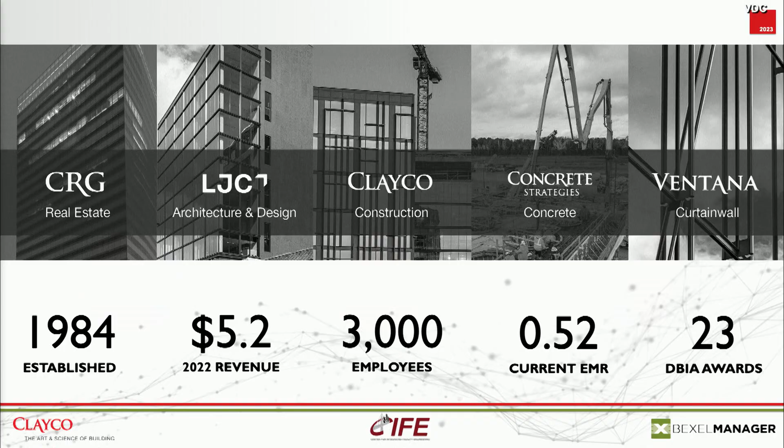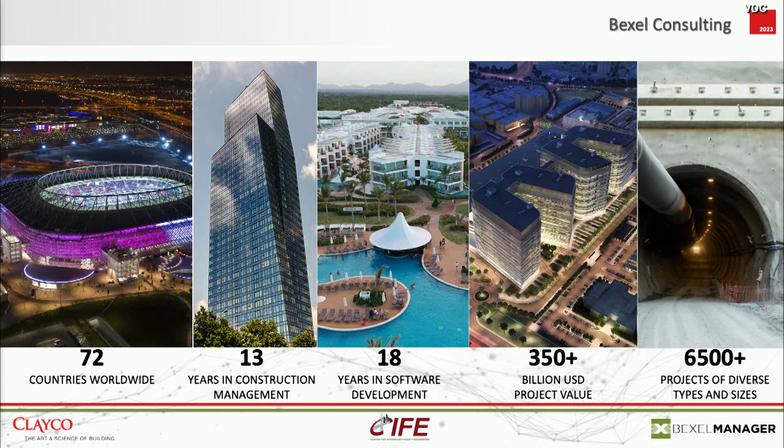Now, Bexel? Bexel Consulting is a software development and consulting company, and we are specialized in BIM in construction. For almost 2 decades, we've been working on different types of projects all around the world. We were, in a way, pioneers of implementing BIM in different types of projects, also using and enriching different types of innovation in terms of software development related to BIM. Throughout the years, we worked on collaboration and development of different BIM standards alongside Building Smart International. As you may see on these slides, we worked on different types and sizes of projects.

And also in the past 6 months, we doubled the number of our clients using our services and also using our unique BIM management platform for BIM construction. Our clients vary in different types and sizes, and include different portfolios of clients that we work with, including architects, designers, different types of designers, contractors, main contractors, subcontractors, and project owners.

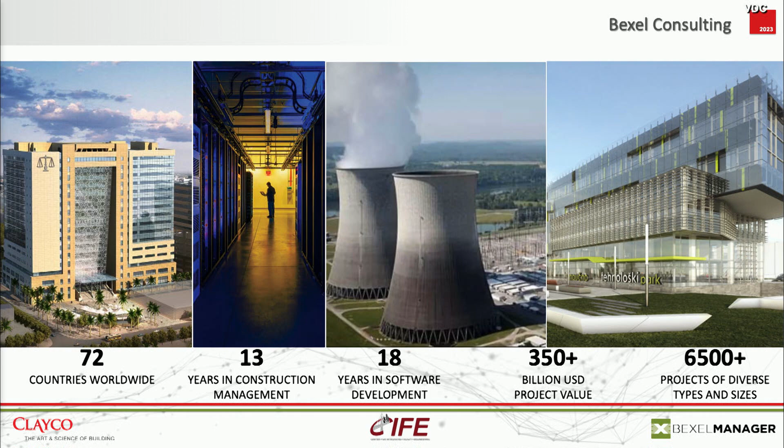So today we are going to talk about how we integrated together, came together to form a team, and looked through the technology partnership. So we'll start with Clayco's vision, and we'll go through technology strategy alignment, and how it's important to align it with our business model. Integrated delivery, or integrated data, is where we'll focus, and how the role of data is really important. As Rob mentioned, data needs to be clean, and that's what we'll look into, and how strategic partnership is a main part of technology strategy alignment.

Then we'll also go deep into Bexel Manager and what their roadmap is with technology. We'll go after strategy for collaboration. The important things for strategy to collaborate are team structure, workflow, adoption, and consultancy. And then we'll go through the challenges and successes which we found while implementing Bexel in our team.

So in our growing markets, we at Clayco really needed to stay competitive in the market. We really approached Bexel as a consultant partner that we could work together with, that brings various experiences from countries all around the world, clients with different backgrounds and different experiences. We really wanted to harness those experiences to our abilities and advance with current clients and future clients.

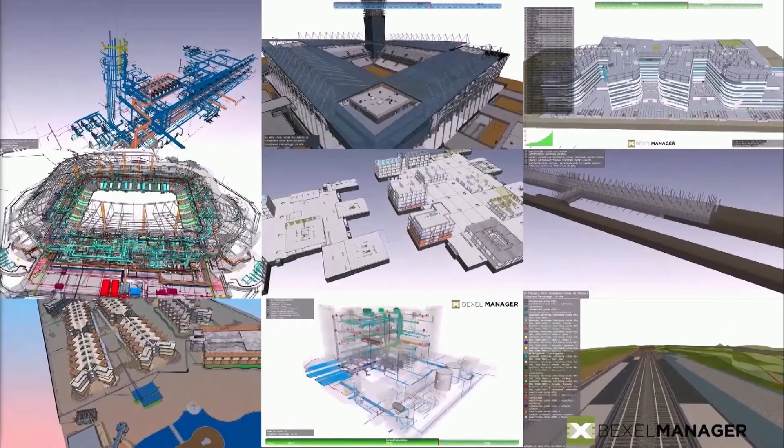This video shows you some of the workflows and functionalities of the Bexel Manager platform and how these different features are integrated using our online cloud-based application.

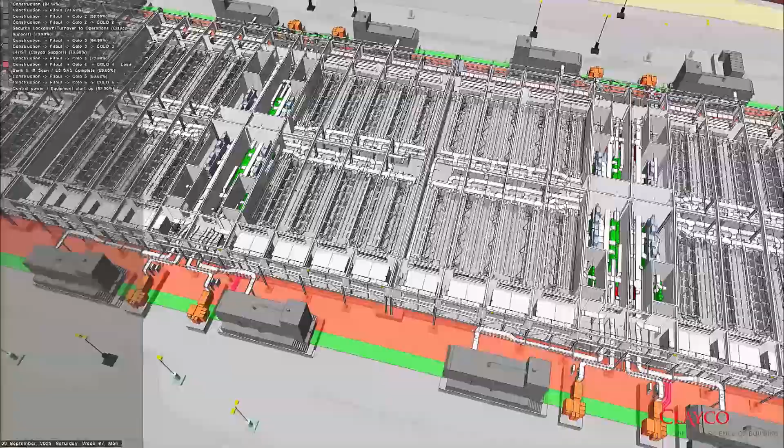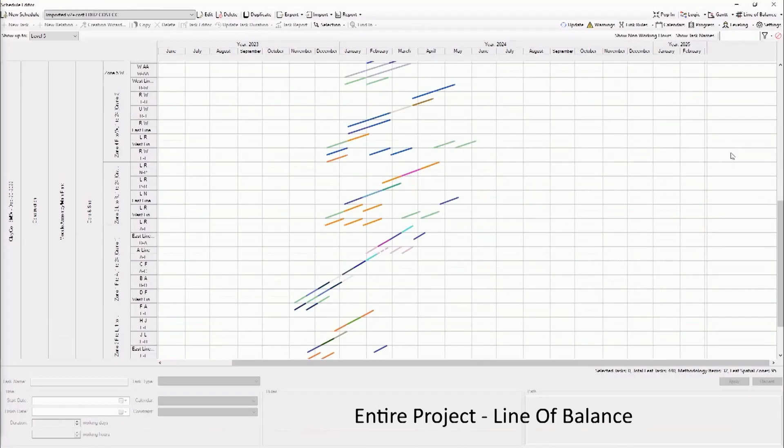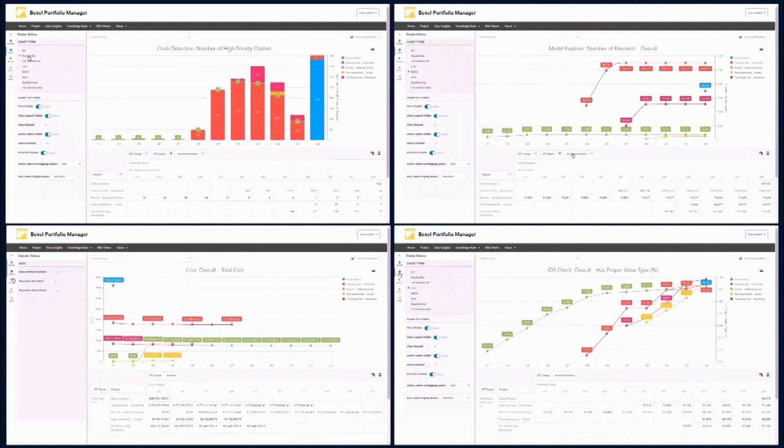As you may see on this video, it showcases different types of projects, and the most interesting thing here is flexibility and easiness to create all this information, set reports, automate creation of reports, and make all these reports accessible to all participants on the project. The presented dashboards are usually produced based on real clients' needs to check key performance indicators for specific needs on specific projects.

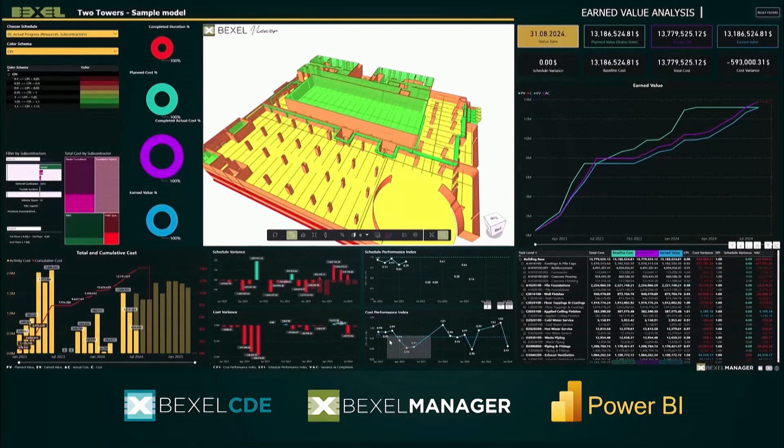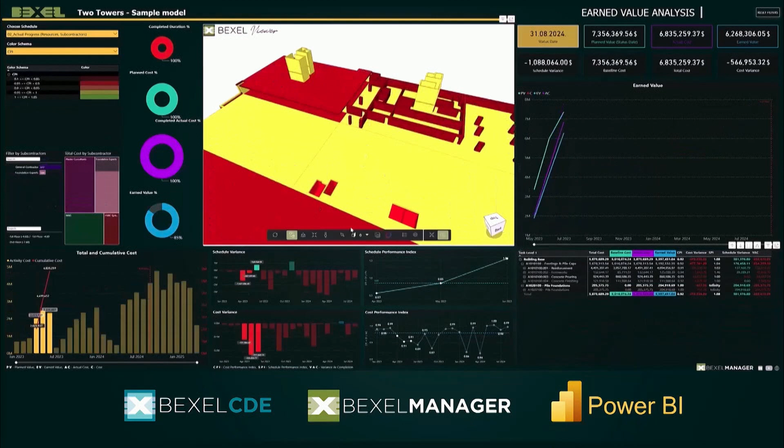For example, we have almost out-of-the-box available reports for cash flows, cost performance index, and schedule performance index, which can help you be more efficient during construction execution. We also have different types of results which can be integrated with Portfolio Manager, another platform which allows us to compare different results on different projects, which can really be helpful for our project owners.

Next slide. If we look at our delivery cycle as Clayco, we don't believe the delivery cycle is a linear process. It's a cycle, as you see here. With new projects being implemented, we always get a head start because we get all the lessons learned from previous projects of similar type. The delivery cycle would show, as you see on the left side, the delivery for Clayco would be based on the processes we see on the left.

And on the right is Bexel Manager's delivery cycle, and you see how we integrate together. We integrate with a lot of systems like cost, quantity, quality, and we also integrate with the schedule system.

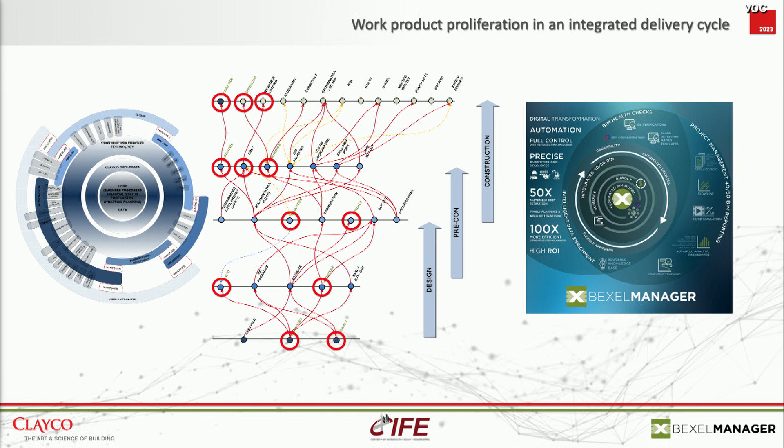We believe that the essence of BIM is actually capturing the construction knowledge and sharing that knowledge, capturing data through all stages of the project, adding additional layers of information which can then be used in the next stages for the next participants that will benefit from that.

This is Clayco's multidimensional project delivery cycle. As Kritika mentioned, as well as our delivery cycle, we're building onto each other, taking just the base principle of BIM and coordination, and building that together with the field team and design team.

We're eliminating waste, gaining project insight with confidence as well. Then we're complementing that component to bring in the live schedule, whether it be Primavera P6 or MS Project, integrating that world within BIM to collaborate.

What I've noticed as well in the field is looking at logistics operations, improving mobilization time in the field, and awareness. I see a lot with subcontractors and new contractors onboarding - on the field side they're able to get a visual aspect of that breakout, of that structure in the schedule, and how it ties in with the BIM model. And then tighter tracking to progress.

We're monitoring that performance in the field with install quantities, cost, and value. And we're communicating that plan as well. When we're doing look-ahead planning sessions within the field, we're clearly communicating what areas of our building, what direction the workflow is behaving, and monitoring that.

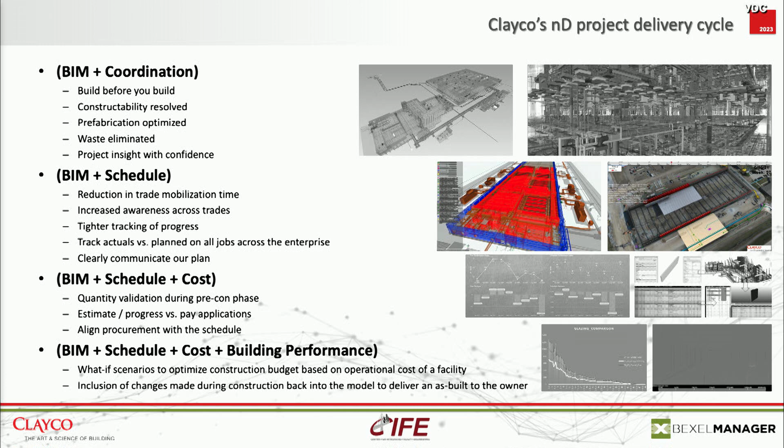So in the past, we've all been there, that siloed approach, that departmental approach - we're really trying to break those walls and barriers down. What we've noticed in the past is redundant information created, not clearly communicated to different departments within the company, leading to multiplication of tasks and inefficiency, ultimately leading to lost time.

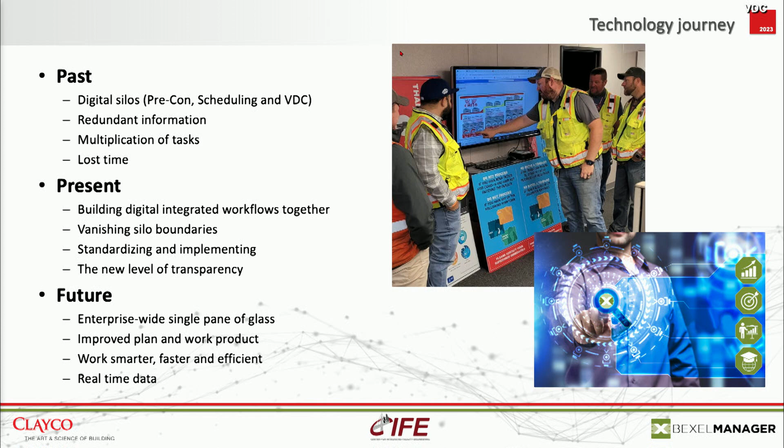In the present, our journey is to integrate all the workflows together with the help of Bexel, vanishing silos, standardizing, and getting into a new level of transparency. In the future, we envision all information being visible, accessible, and available to everyone all the time.

So when Clayco and Bexel come together to work, we have a unified project team. We have advisory roles such as Mileta here, and we get into joint meetings to discuss all the issues together. We have shared objectives, which gives us a workflow to build trust.

Bexel, we don't treat as a consultant. We really look at that as a partnership together on all project phases, and deliver working collaboratively.

As we align these worlds - scheduling, BIM modeling, cost and estimating - we need to adopt standards to streamline the process. There are challenges along the way, but if we better integrate, that streamlining happens quickly. With lessons learned, we continue to improve, and that's also the benefit of Bexel Manager - any lessons learned on our projects get taken to other clients to bring that opportunity there.

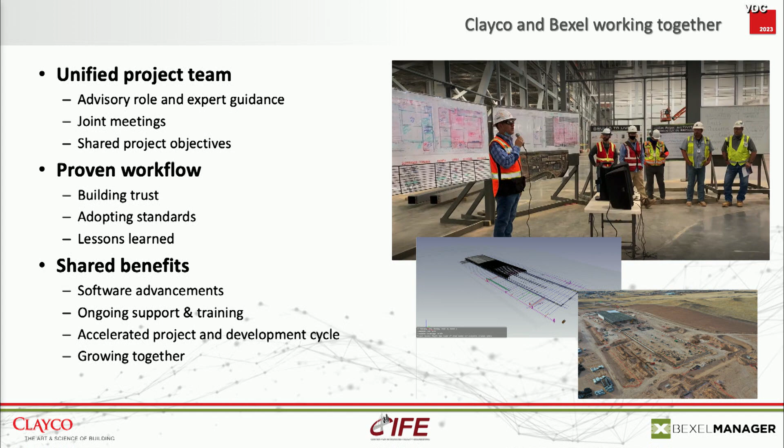And we get shared benefits for both of us. Bexel as a software gets their advancements, and we always get ongoing support and training from them, and we grow together. It's like a win-win situation.

This is a project example. I was on site in Cheyenne full-time working there. It is really windy, so I don't recommend going there unless you're going for a site visit or to see bisons. But this is a really great project, a data center - let me play the video.

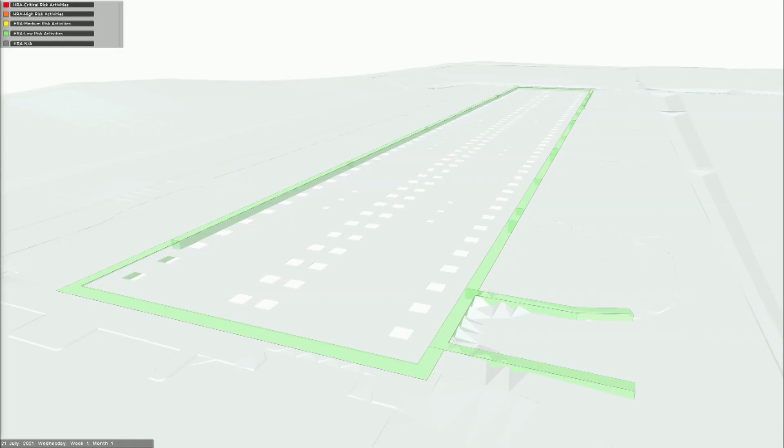So you see multiple colors for different elements. It signifies 5 different levels of risk, high-risk activities, and we used to play this during safety meetings to help all the subcontractors know which element or area they needed to focus on regarding risk.

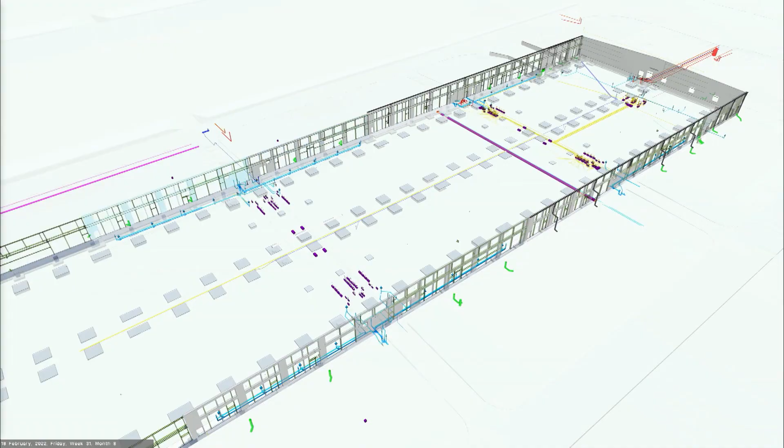And now jumping to the fit-out, this is a 4D video which we used to play during the daily meetings to know the process and where subcontractors needed to focus.

And we found, using 4D on this project, a lot of missing tasks which were not linked with the schedule, so we were able to save some cost. We were able to sequence properly using the video and using Bexel Manager.

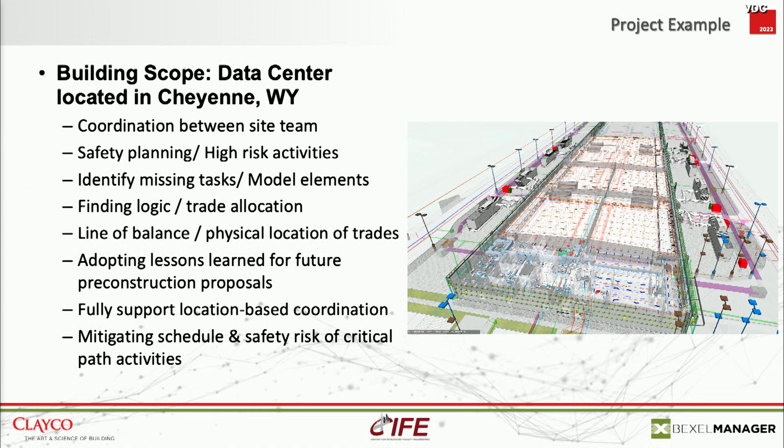Line of balance is one of the main things in Bexel, which really helped us allocate the activities and not overlap the locations. We also created lessons learned for future similar projects, and had fully supported location-based coordination using this. It was a fun time.

Okay, this was a high-rise multifamily purpose building in downtown Phoenix. I was able to work with Bexel Manager on this.

The video you'll see to the bottom right here is a typical floor plan layout that we built by floor. It helped the trade partners understand how the superstructure interacts with the exterior curtain wall, and then going into the MEP overhead works, as well as the interior fit out. There were a lot of multiple trade partners all within one region of the level, and we were able to improve coordination going from an east to west direction.

Some of the other gains we benefited from was spatial structure alignment - that's a big principle within Bexel. When model files come into the software, we realign those elements to proper levels of how we actually construct the facility.

One area too, as we've mentioned over the past couple of days, is constructability. Elements that are spanning multiple building levels - we don't necessarily build like that. We're breaking up by level to support the schedule that goes vertically higher in the facility.

So breaking up the model to support construction, and then delay analysis - that is an OxBlue camera comparison to a static image of a delay analysis, showing where we're at to date versus where we plan to be in the 4D.

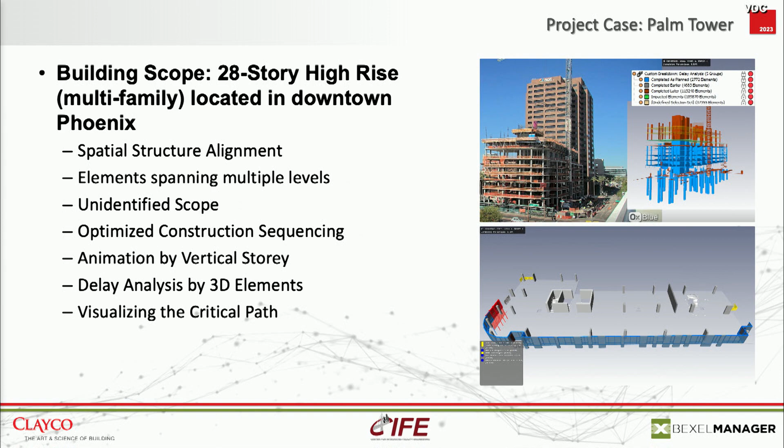And then visualizing the critical path, that was a strong attribute as well, showing those red elements to focus meetings on what we need to hit our target to meet our completion milestone.

Next slide - so, challenges, right? Old habits die hard.

It's an adage that our industry is trying to get away from, but it's ever present, right? So utilizing new technology, how does it improve our core value and our core structure of the company? Resource allocation and budgeting, right?

This is a demanding collaborative phase in a project that takes a lot of time and investment that will have positive outcomes for a project.

A lack of integration, if we're still in this department mode, not integrating or aligning, makes it cumbersome to get to this process, to get to a 4D model if we're not aligned and standardized. And earned value, we've looked at clients that want this earned value approach, and if there's a lack of integration, if your estimate isn't structured correctly with the schedule and model, you will have potential conflicts.

Then accountability with the project team. So we are in the process of creating a scorecard so that we know where we are with the quality of 4D, which we are creating for the projects. We are work in progress on that side.

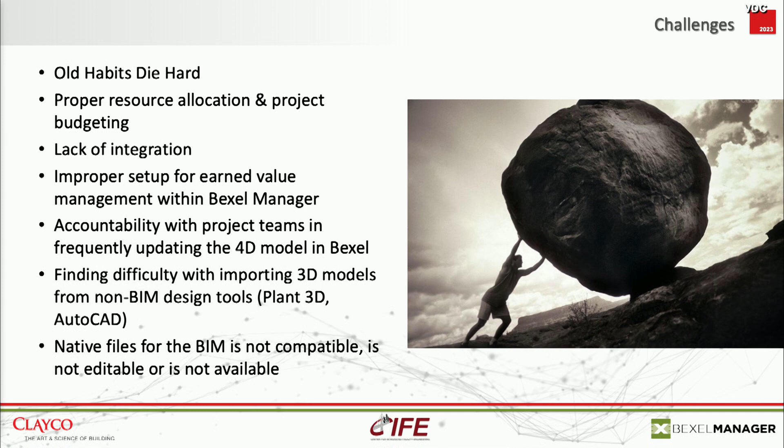Next slide. Okay, so standardizing across the board, right? We're looking at aligning. A principle that has come up is actually looking at CSI master format structure to properly align between cost, schedule, and BIM elements.

To properly get us to 5D. Speed to market. Any technology that we really bring in-house to Clayco, we need to look at how our aggressive timelines support that. If technology is still in its infancy, or we're still getting there and it won't support the timeline of our aggressive projects, it may not be aligned with our purpose there.

Meeting the needs of tomorrow, we just learned about AI and how that really is gaining benefit to our projects. And it's looking ahead, looking at bringing and adopting those standards.

And gamification is the idea that we need that level of interest and curiosity that comes along with video game concepts, but bringing that collaboratively together with the field teams and gaining interest.

As Stephen mentioned, gamification, we need to make our site team as comfortable as we are with the model navigation, just like games or phones, how technology improved, how we are now comfortable using our phones. We just need to get there, train them enough.

Shifting the paradigm of collaboration. We all know what COVID did to us and how we did collaboration using Teams, and we can go ahead more than that.

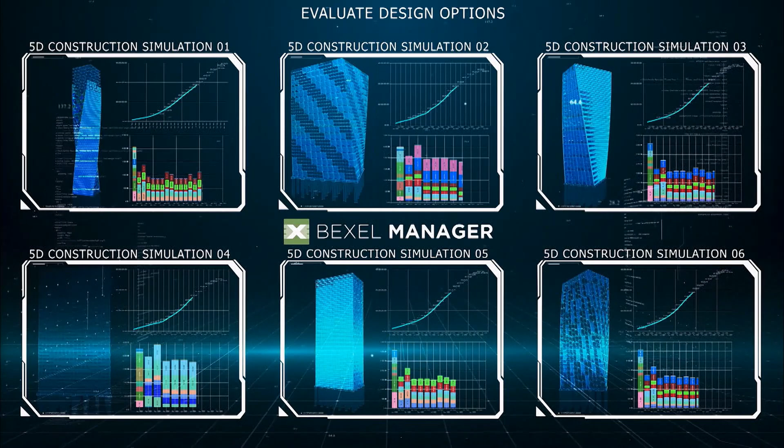From the perspective of the software development company, we always try to keep track with technology innovation. And at the moment, we are able to automate a lot of processes, including BIM checks, BIM data enrichment.

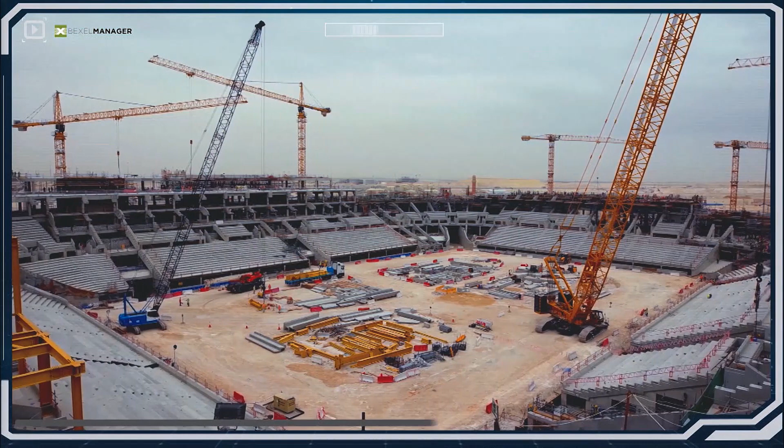Also, in the future, we're trying to embrace all this machine learning and AI to streamline the process of evaluating the design itself, evaluating the constructability of your project, also evaluating the schedules and planning data, and trying to produce more accurate information.

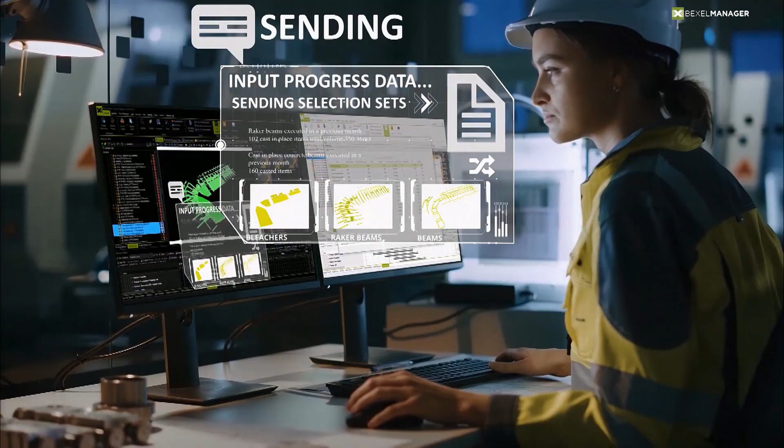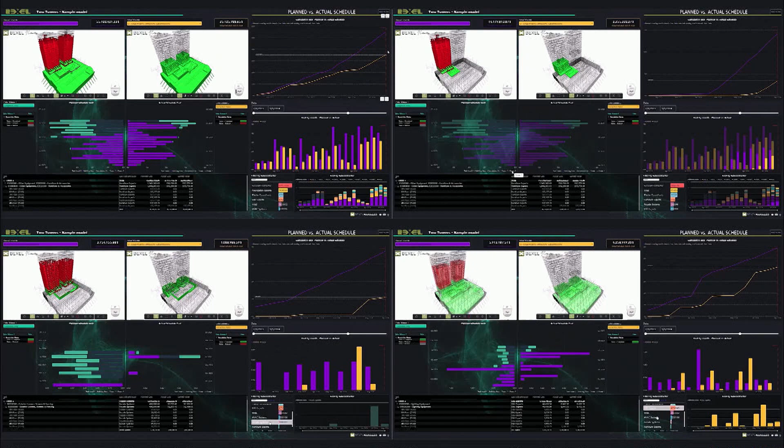Also, in the future, probably we're going to integrate with a lot of IoT technologies and also with large cloud data warehouses, which will enable us, in a way, real-time project information sharing - meaning we can use all this shared information at the same time, in real time, make it available to all the project stakeholders, so project managers or project owners can feel like commanders in an interactive command center.

Thank you for your time today. We're really looking bright into our future, and we work together doing that.